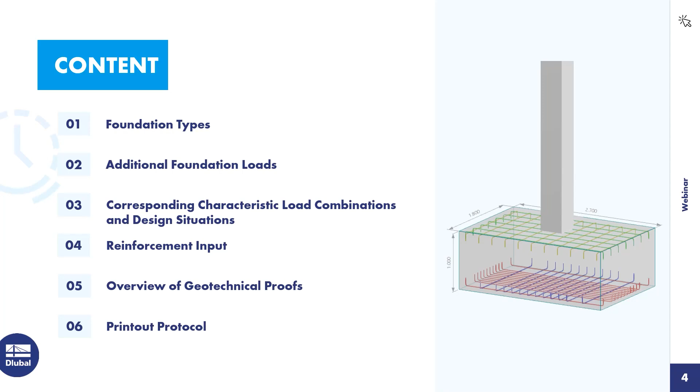Let's now switch to RFEM 6. I already created a steel hall with concrete columns and concrete foundations for you.

First, I will show you the basic settings where the foundation add-on needs to be activated. You can find it here at the top.

Under the add-ons, you need to make sure that the concrete foundations are activated. Concrete design doesn't necessarily need to be activated, but since I have a model with concrete columns here, I activated this for this webinar.

However, for the design of concrete foundations, you do not need this.

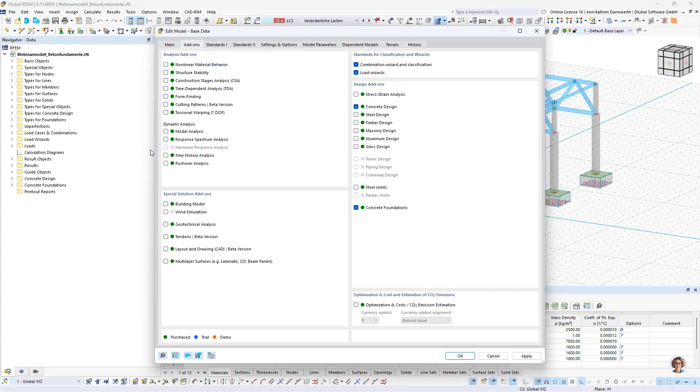Once the concrete foundation add-on is activated, we get new folders in the navigator, which I will now show you. Here we get the types of concrete design.

Normally we would get effective length, reinforcement directions, surface reinforcements, or punching reinforcements here, but only the concrete durability, as we need this for the foundations.

Additionally, new types for foundations have been added. Here you can create foundations individually and edit them.

Also under loads, when I go to load case, a new point for the additional foundation loads has appeared. Here you will find everything such as earth covering, surface loads, line loads, concentrated loads, and groundwater.

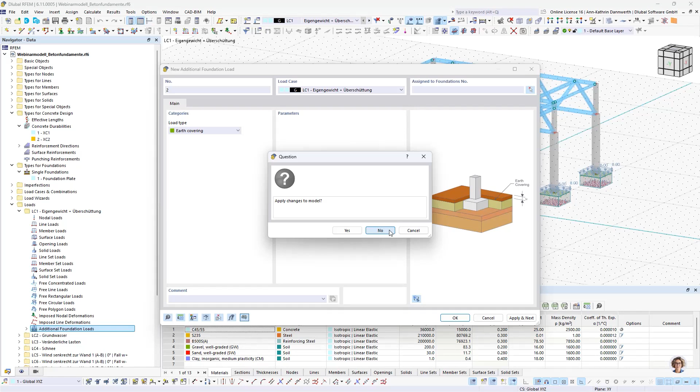At the very bottom, another tab for concrete foundations has appeared. Here you can view and edit the design situations as well as the objects to be designed and the design configurations for the geotechnical proofs or concrete design.

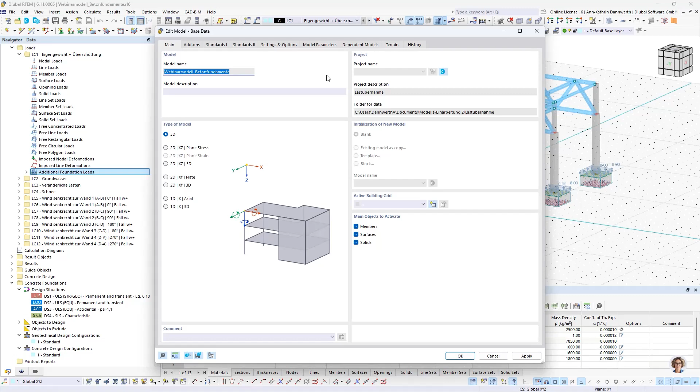What I forgot to mention in the basic settings is that if you want to generate snow or wind loads using our load generator, it would be helpful to provide your location or these data under model parameters.

If you don't want to enter them manually, you can simply select the location on the map and the latitude, longitude, and altitude will be automatically filled in, but they can also be modified here.

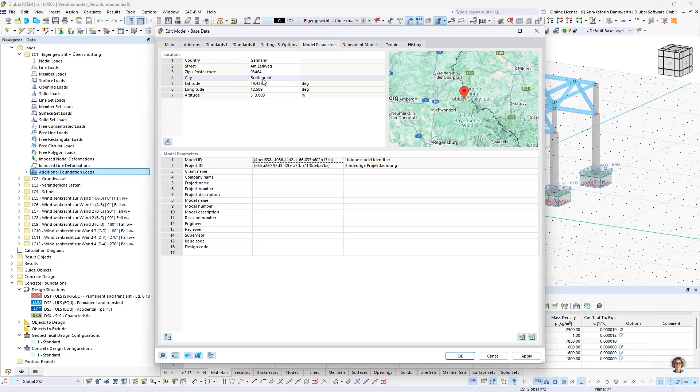I will show you now what has been modeled so far. Let's go into basic objects and materials. Here I have steel, concrete.

Steel for reinforcement, along with 3 different soils.

When creating a new material, we can go to the library to load all kinds of soils. You can find them here under material type soil.

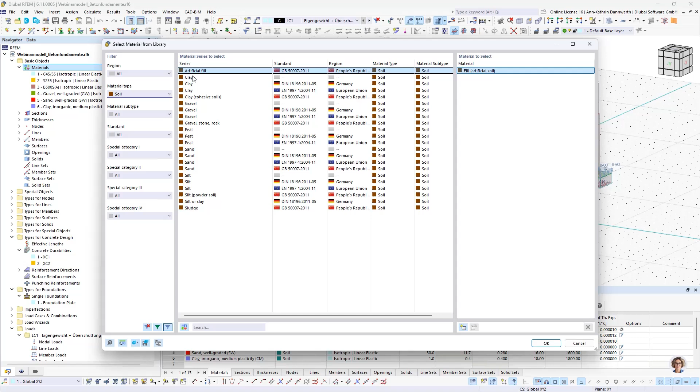I simply pick one of those now to show you the basic model parameters. However, you will likely receive different values from your soil report, so you can easily change the values.

In the material properties so that they are correctly considered in your verifications.

Next, let's move to the cross sections.

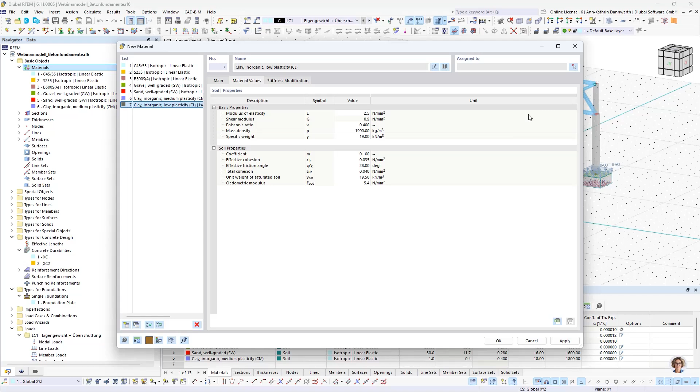I've created 2 rectangular cross sections made of concrete and 3 different HEB beams. They can also be easily loaded from the library, just like the materials.

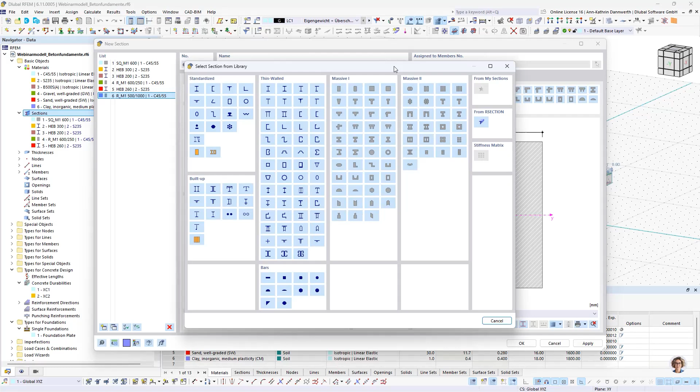Here you have different selection options. From this point on, it becomes interesting for the foundation modeling. Foundations must be assigned to supports.

To do this, I will open the types for nodes folder and access the nodal support. I've already created one here. I can either create a new one or edit the current one.

So I have now set my support with my support conditions and would like to assign a foundation. To do this, I need to check the box foundation.

When I do this, I get a new tab for foundations, and now I can select the foundation I want or create a new one. However, there is another way to create it. I will walk you through that method.

The one here has already been prepared and defined. At the top, you can see all the nodes assigned to the support, and this foundation is then assigned to the support. Accordingly, these are also the nodes for which the foundation slab is defined.

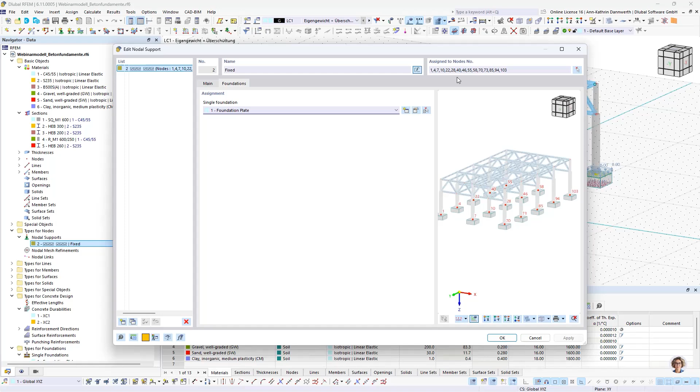Now I will go to foundation types and create a new single foundation. Here you can determine the type of foundation, which can be a foundation slab with or without reinforcement, a block foundation with smooth bucket sides or with rough bucket sides.

A block foundation with smooth bucket sides or with rough bucket sides. You can also, when you select one of them, see the graphic over here.

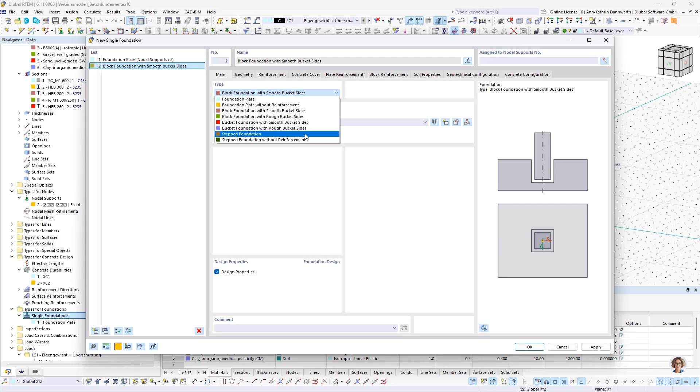Then we have bucket foundations with smooth bucket sides or with rough bucket sides. And new implemented are stepped foundations, again with and without reinforcement.

So far, only the geometry of the stepped foundation can be determined, as this type of foundation is still under development. Let me go to the foundation slab now.

In the second tab, you can create the geometry. You can define the slab geometry with the dimensions of the slab and the slab thickness, as well as the eccentricity of the column above it.

If a node or support has already been selected, the support dimensions will already be filled in here. The program automatically retrieves them.

You can also define a base plate at the foot of the support. This is very helpful because in the steel joints add-on, the geometries are also directly transferred, and anchors or reinforcements can be applied and designed there.

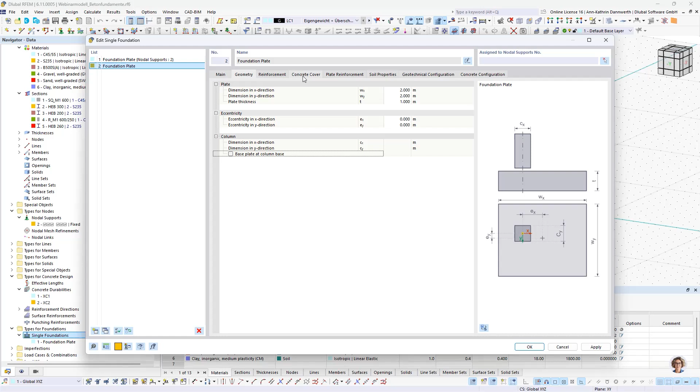Now I'll say something about the reinforcement later. Let's go back to the concrete cover. This can be controlled via this tab. Here you can also see the durability.

You can set different minimum concrete covers for the top, bottom, or sides. These values are automatically determined by the concrete durability settings. Alternatively, you can set these manually and adjust them as needed.

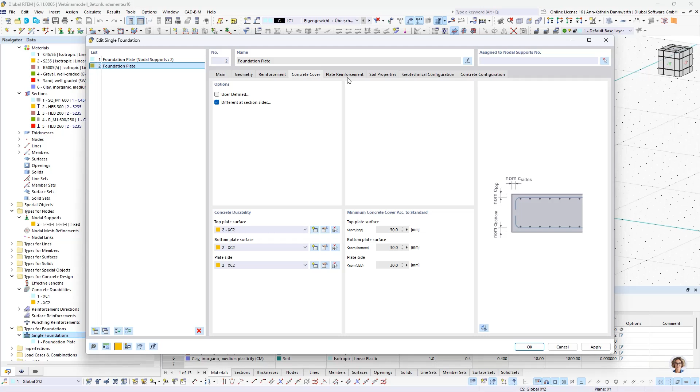Next, let's move to the soil properties. Here you have the settings for the subsoil. The conditions can be created as drained or undrained.

For the definition type, you currently only have the single layer option. The multi-layer option is still in development. This can then be controlled through boreholes, or if you have the geotechnical add-on, you can define them in the future via a soil massif.

Here you can also set the soil parameters for friction angles, groundwater level, and earth covering.

However, I first need to pre-enter something in the soil layers. The gravel was automatically selected because it's the first material of the soil type. So that would be region A below the foundation.

Region B would be beside the foundation. I can define that here. I'll just add sand for now.

If I want to have earth covering, I also need to fill in region C. Then there is the option of earth covering here, and I can enter the thickness. Let's say it's 1 meter. I can see that directly here. That's 1 meter above the foundation node.

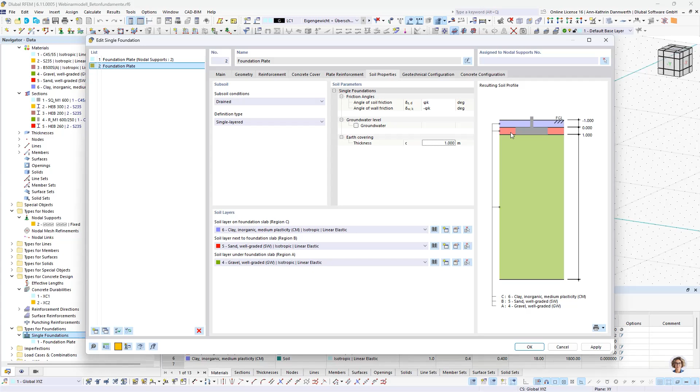Now let's move on to the geotechnical configurations. Here you'll find all the safety factors and other factors you need for design verifications. These can be controlled by reviewing or editing the geotechnical design configurations.

The parameters you just saw can be set here in the standard parameters. In the basic settings, you can also deactivate design loads if you don't want them.

You can also assign different design configurations to different foundations. Accordingly, you can decide individually for each foundation which settings should be activated or deactivated for the foundation design.

For ground failure, there are two options for determining the ground failure resistance. It can either be calculated according to the Eurocode, or you can manually enter a characteristic value.

For the sliding verifications, there are also adjustment options. Here you can control whether the equilibrium, uplift, or the large eccentricities should even be considered for the verifications.

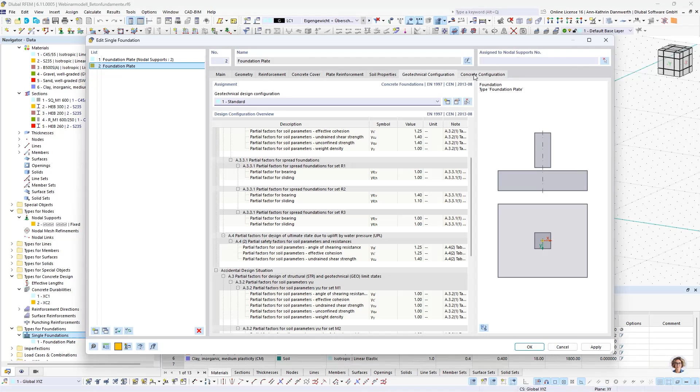Now let's move on to the concrete configurations. This section is similar. There are many safety factors here, as well as material parameters and ultimately everything we need for the design. You can adjust these here.

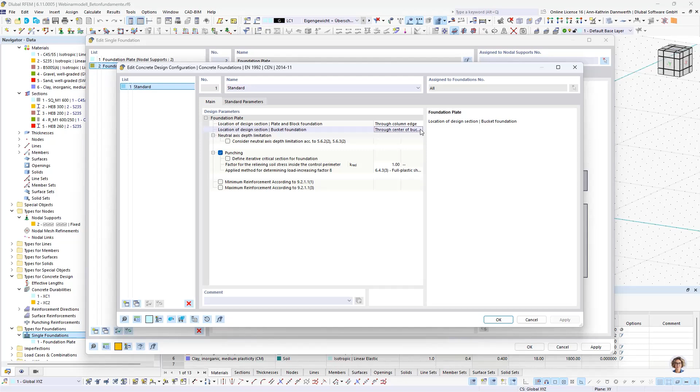In the basic settings, you can also determine whether punching shear should be considered in the design and how the handling of the minimum and maximum reinforcement should be managed. The position of the design section can be set here at the top.

Now let's move on to the additional foundation loads. I will go to the Loads folder into load case 1, and here to the additional foundation loads, where I will create a new one. For the load types, we have surface loads, line loads, and concentrated loads available, as well as earth covering and groundwater. The surface load can be applied to the entire foundation by simply assigning the foundation and setting the load size.

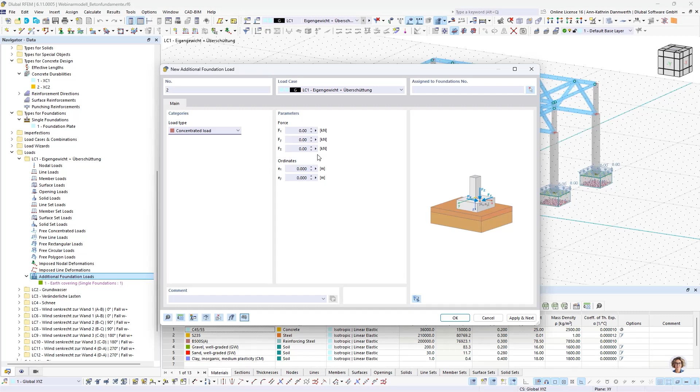Line loads are similar, but here you can also define 2 points on the foundation between which the line load should act. These ordinates have the node of the foundation as their center. Let's move on to the concentrated loads. This works the same way. You can determine the location of the concentrated loads through the ordinates, again depending on the node of the foundation, and define the components in the X, Y, and Z direction.

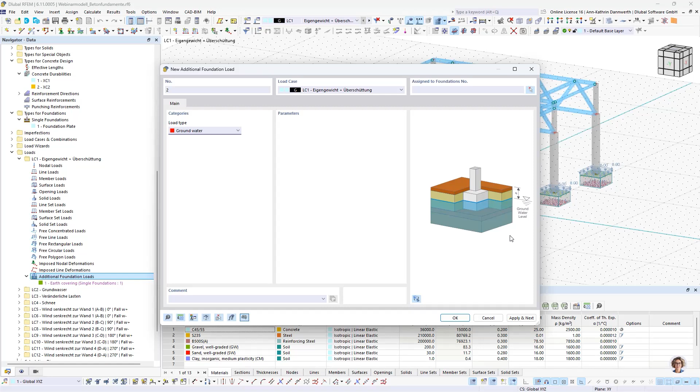The earth covering is automatically generated by the system. You can control this through the soil properties when editing the foundation itself. The same goes for groundwater, which is also automatically created. I will go back to show you. In the self-weight load section, I have enabled earth covering, and it's why it appears purple here, since it has been automatically generated. If I go back into the foundation, into the soil properties, this is where I can define it. The weights from the earth covering are also considered here. So there's no need to calculate the earth covering or convert it into a surface load manually.

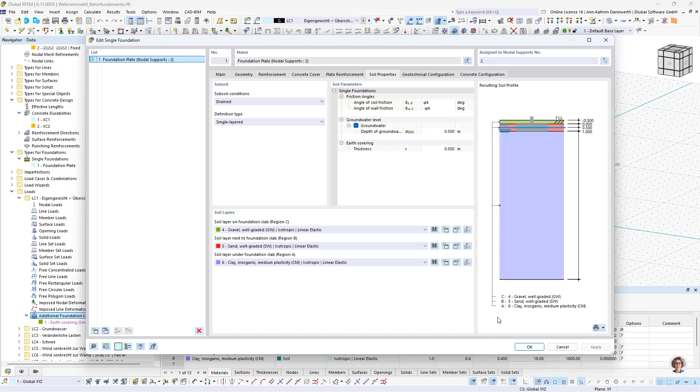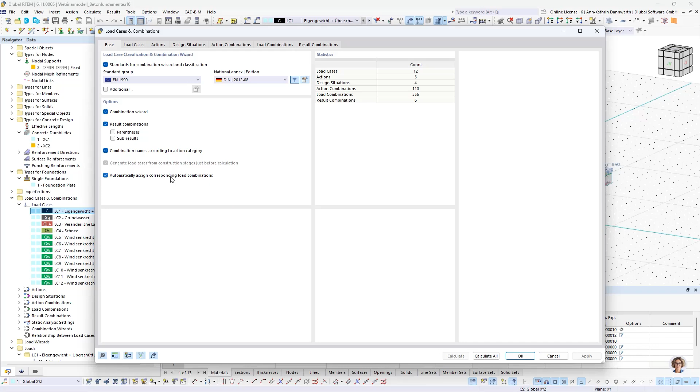Now, let's move on to the corresponding characteristic load combinations and the design regulations. I will go into the load cases and the basic settings. If the combination wizard is enabled, the box for automatically assigned corresponding load combinations should also be checked. Accordingly, you will later have the load combinations generated by the load wizard in the load combination section. Therefore, you will later find the combinations generated here, and the corresponding combinations should also appear.

The ground failure and the sliding safety verifications can only be carried out with the assignment of these characteristic loads. Manual assignment is also possible. So if you don't want to use the load combinations from the combination wizard and prefer to create them manually, you can also add the corresponding characteristic loads via this drop-down menu here.

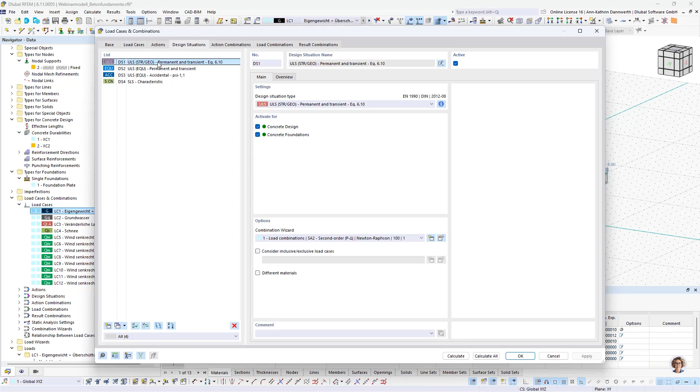Now, let's have a look at the design situations. For the geotechnical verifications, we need the ULS, ultimate limit state, for permanent and transient loads. We also need the design situation for equilibrium of structures for both permanent and transient loads. You can set all of them here. In addition, the one for accidental influence, and of course the characteristic one, which we definitely need to assign.

What I forgot to mention earlier is that for the additional foundation loads, we need to activate the self-weight for the concrete foundations in the load case, where the earth covering should also be considered. This will add a new tab at the top. When we go to this tab, we can specify exactly what should be included in load case 1. In this case, I added the active self-weight of the foundation structure to the self-weight and included the earth covering.

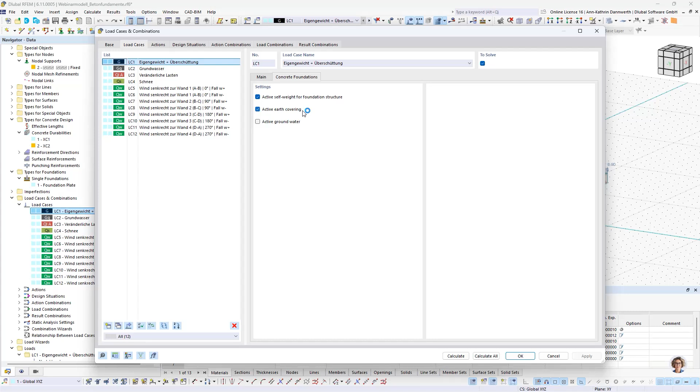I placed the groundwater in a separate second load case because it can also positively affect the verifications. You can see that here. Now only the active groundwater is included into this load case.

Now let's go to the reinforcement input, which I skipped earlier. For the foundation plate, you can define the material and the reinforcement type here. As mentioned earlier, you can choose from mesh reinforcement, reinforcement bars, or a combination of both. I've chosen a combination of both here.

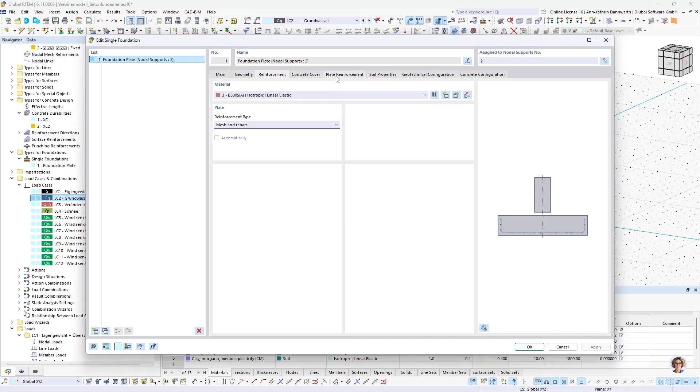I will then go into the plate reinforcement. Here I can define what I want to lay for the upper and lower reinforcement individually. First, we have the definition of the mesh. Again, there's a selection of various meshes I can choose from. The bars can also be defined in the X and Y directions, with diameters and spacing. The same applies to the lower reinforcement. Here I can define the mesh and the bars in the X and Y direction. What might be interesting here are the areas 1 and 2.

Area 1 is the outer quarter, both left and right. Area 2 is the middle section.

Now you can also view the reinforcement arrangement in our program. To do this, I will first turn off the upper reinforcement so we only see the lower reinforcement. Now you can see the number, the rolled diameters of the reinforcement, and the position numbers.

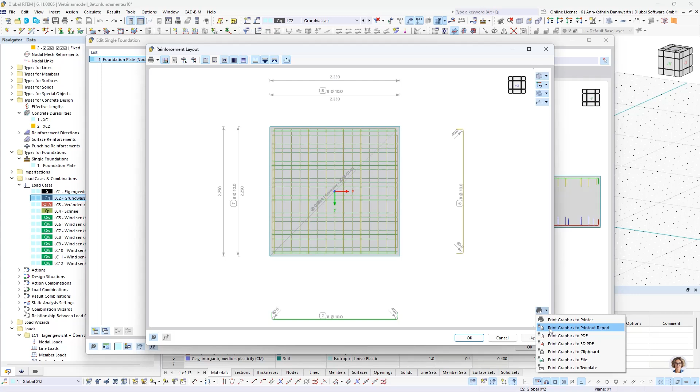The same can be done for the upper reinforcement, where you can also see the mesh designation. And through this button, you can print this graphic directly into the printout report. But I will talk more about that shortly.

I also wanted to show you the reinforcement input for the bucket foundation. Here I will choose a bucket foundation. The geometry does not yet have a support because I have not assigned a node or a node support yet. I will do that quickly.

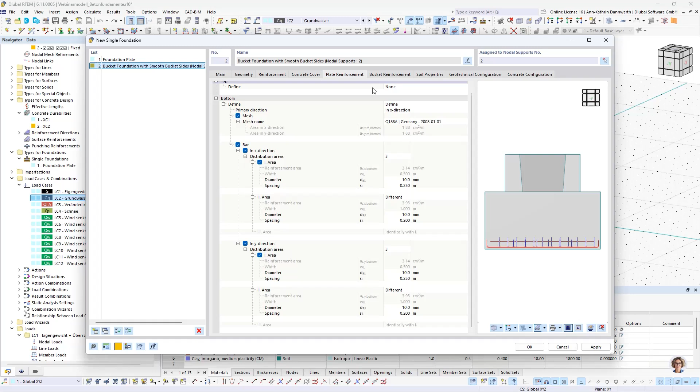Now we can go into the plate reinforcement. It looks the same as with the foundation plate. The bucket reinforcement has now been added as well.

Here you can define the horizontal stirrups first. You can also define the vertical stirrups in the walls in X and Y direction. Let's take another look at this.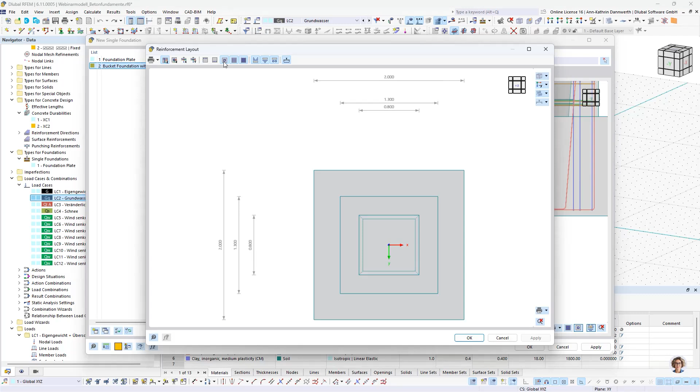To display the bucket reinforcement, this button must be activated. I've turned off the other two for now. And here you can choose between different views to display the bucket reinforcement in all three views.

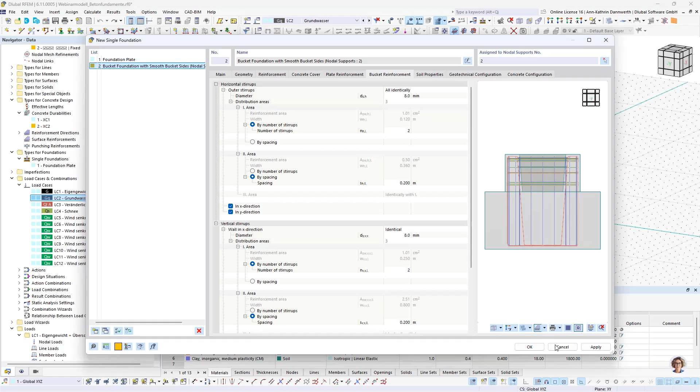Next, I'll give you a more detailed overview of the geotechnical design checks, which are an essential part of evaluating the foundation stability and safety. I already had the system perform the necessary calculations in advance to save time.

I will go ahead and turn on the results here and navigate to the concrete foundations. In the overview, you can see that one of the design checks has not been fulfilled. I'll go into more details on that shortly.

Here you can view an overview of the relevant results, which gives you insight into the performance of each foundation. This overview is sorted per node number. Additionally, it shows which design checks have been carried out for each foundation. Let me make this a bit smaller so we can clearly see the names of the checks as well.

First, we have the ground failure design check. When I go into that, we will see the complete calculation process for this specific check.

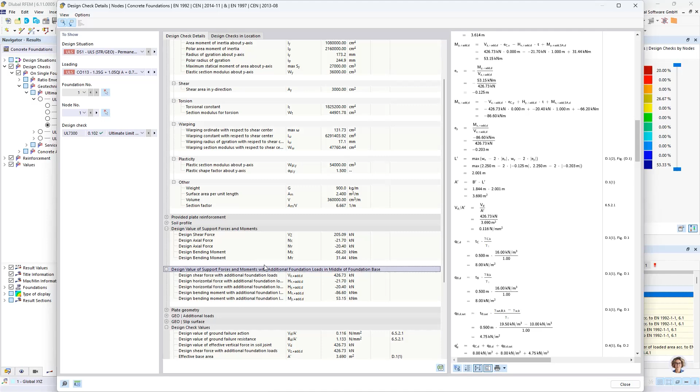All the necessary details are provided here, including cross-section values and design forces that contribute to the calculation. This helps ensure that the foundation will remain stable under the given loads.

Let's take another look at the top here, where you can find these results. In the navigator under Results, you can easily view the geotechnical design under the Design Check section.

Specifically, in the ultimate limit state, you will find the number UL 7300, which corresponds to the ground failure design check. If we click on that, you can view the utilization for each individual foundation.

This will show you how close each foundation is to reach its limits. Additionally, you can also see individual stresses here, which provides an understanding of how forces are distributed across the foundation. If necessary, you can also view the failure figure, which helps identify the exact area of concern.

Moving forward, I also have the sliding design check, which is another important aspect to consider in the evaluation of foundation stability. You can also view this design check for each individual foundation, ensuring that sliding movements are within acceptable limits.

Furthermore, here is the design check for the equilibrium of structures, which has been exceeded for some of the foundations. Since this involves tipping around an edge, you can also display which edge is critical or which design check has not been fulfilled. Looking at this, I see that for these three foundations, tipping around the right edge has not been fulfilled.

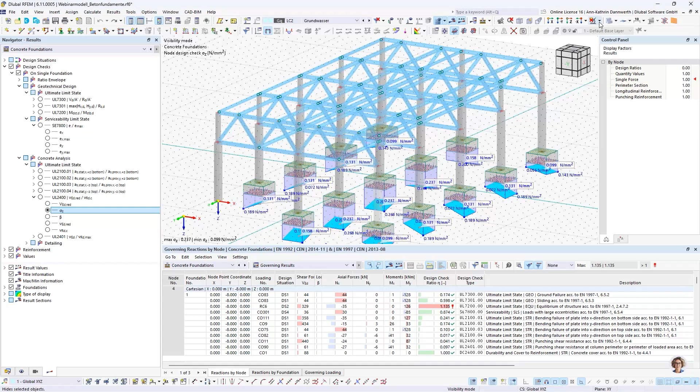Since I have several foundations in a row, I can also choose to display just one foundation at a time to get a more focused view. This way, I can see the exact stress distribution for that individual foundation. I will hide this view now to keep things clear.

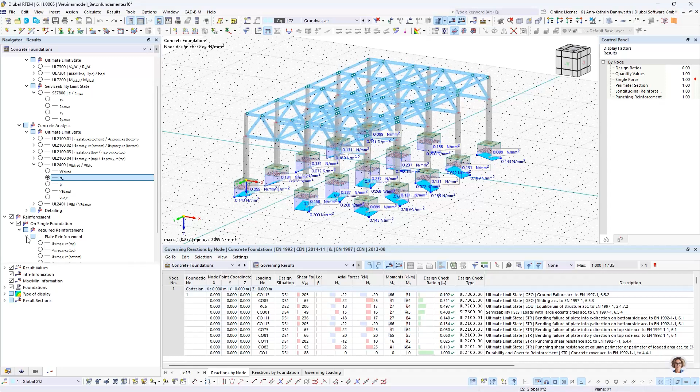You can view the upper reinforcement here, for example. This is the reinforcement in the X direction at the top of the foundation. Similarly, this is the reinforcement in the Y direction at the top. The lower reinforcement is displayed in the same way, providing a complete picture of how the foundation is reinforced.

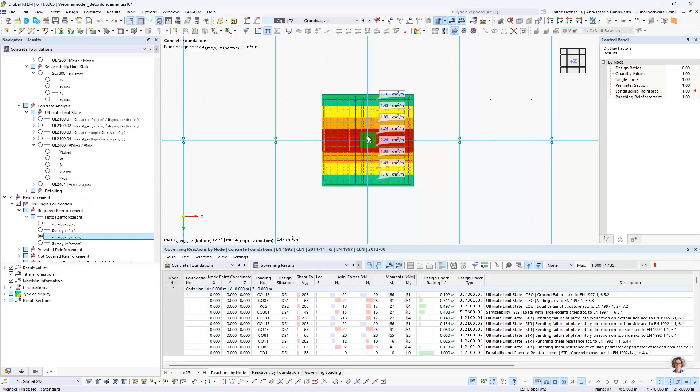Let me switch the model to wireframe mode so that we can only view it from the top. This view allows us to see how the reinforcement is distributed more clearly. This way, you can also see in more detail where and how much reinforcement is involved, ensuring that every part of the foundation receives the necessary support.

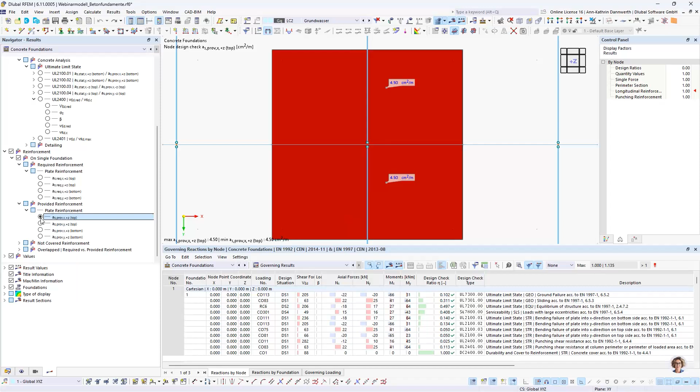The same applies to the existing reinforcement, which you can also display. Then you can view the top reinforcement in both directions as well as the bottom reinforcement in both directions. And you can also see here the uncovered reinforcement, which should be 0 everywhere, indicating that no areas of the foundation are left without adequate reinforcement.

Perfect. This is done analogously for other types of foundations, as well as for the bucket reinforcement, ensuring the structural integrity of the entire foundation.

Now, let's take a look at the printout protocol. I will create a new printout protocol here. In the Printout Protocol Manager, you can manually decide what exactly should be included in the printout.

I will start by reducing everything, selecting all, and then deactivating everything. Now I will only select the items that are relevant for the foundations. So I've selected the folder Types for Foundations here.

Let's see what we have. For example, I don't have rough bucket reinforcement, but I do have plate reinforcement. These are the relevant options for this model.

In the loads section, we also have the additional foundation loads that I'd like to include just to show you. Of course, I can select many other options, but it depends on your specific needs.

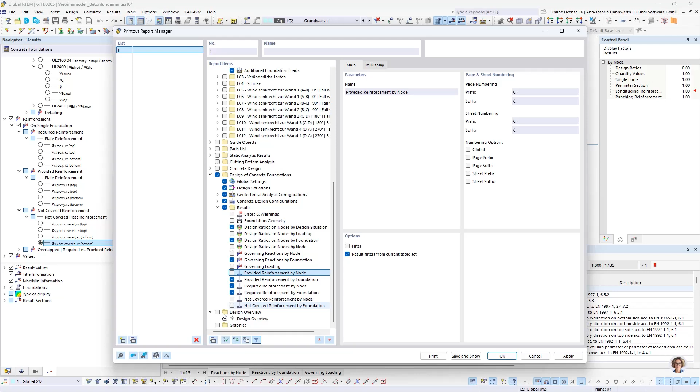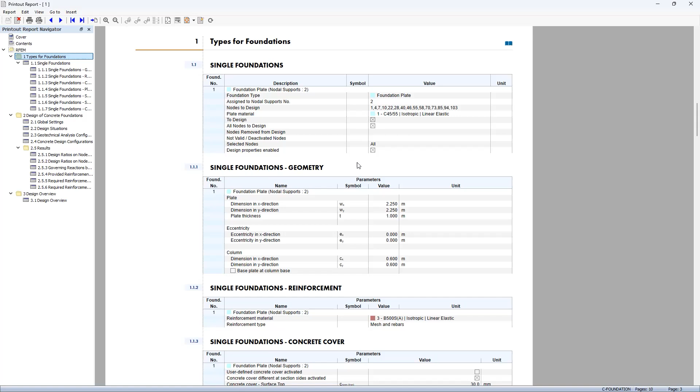This is how the printout protocol looks. Here we have the table of contents, and then it directly starts with the types of foundations. Here you can see again the types of foundations we have, which node they are assigned to, the material assigned, and then the geometry you selected. If you had several foundations, you would see a list with multiple tables like this.

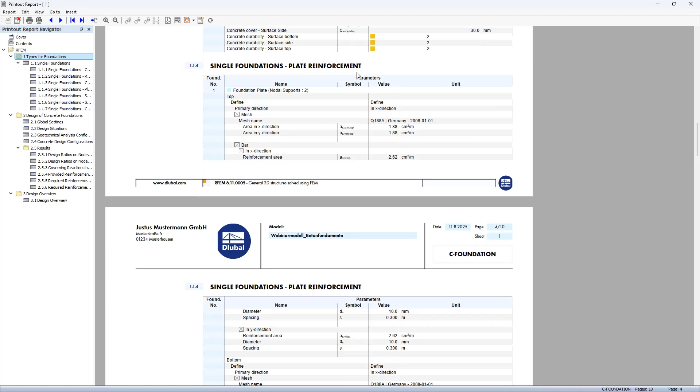Then we have the type of reinforcement, whether it's a mesh reinforcement or rebars, and the materials for the reinforcement steel. Next, we see the concrete cover for the foundations and the amount of reinforcement laid out, both in the mesh in the X and Y direction at the top and the bottom.

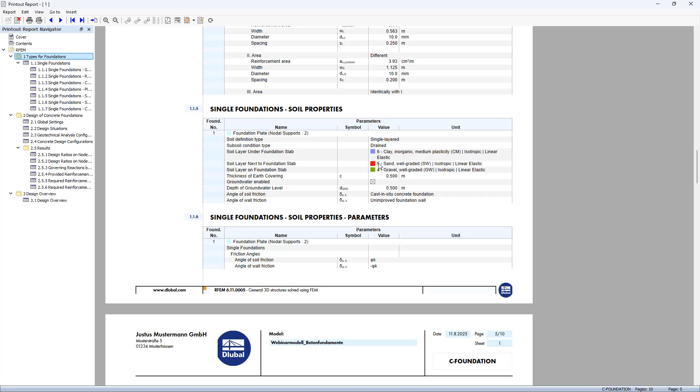You can also see the selected soil properties here, or rather the soil layers that we've chosen. This includes earth covering, groundwater, and the friction angle. Finally, we have the global settings. For example, the design approach is set to approach 2, which is relevant for the ground failure design check.

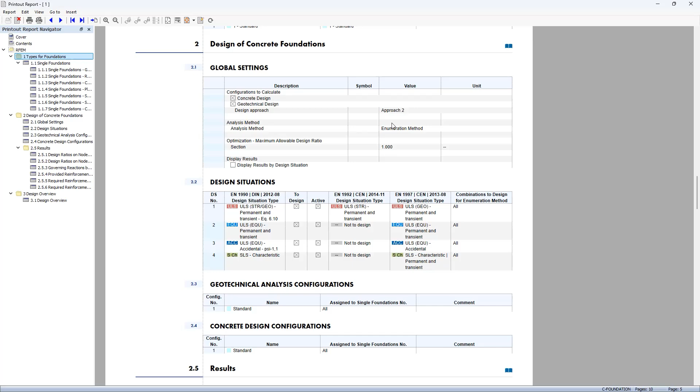I didn't show you the global settings earlier, so let me go back to the model, to the foundations input. And then you will find the global dialog for settings. Here you can select the design approach. As I mentioned, this is important for the ground failure design check.

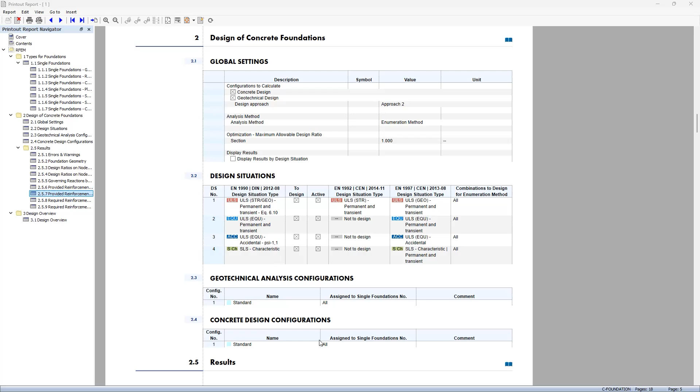Now I'll go back to the printout protocol. Here I have also included the design situations for ULS, the equilibrium of structures, as well as the accidental and characteristic cases. I've also output the configurations for the geotechnical analysis. Then here are the errors and warnings.

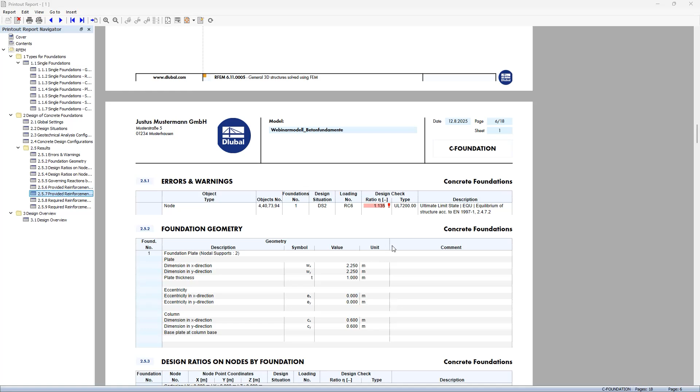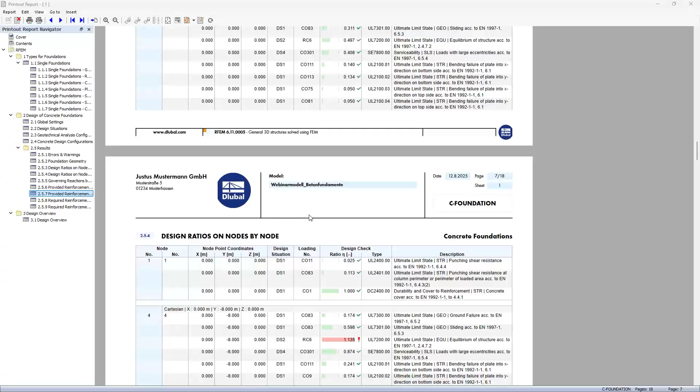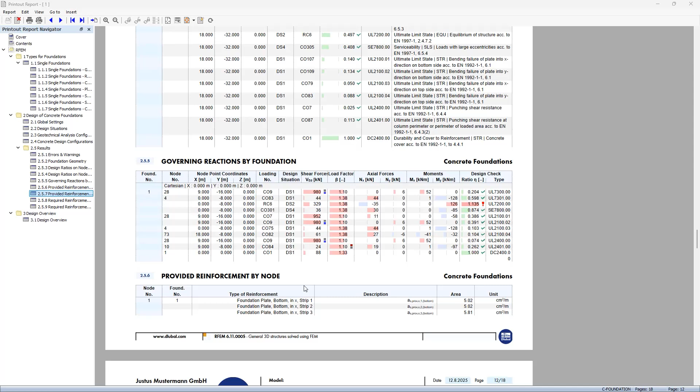The design check for equilibrium of structures was not fulfilled, as I showed you earlier. Next, we have the plate geometry and the utilization at the nodes, node by node, which is more detailed since we have a few node foundations. You can see in detail at which node and foundation, in which result combination, the design check did not pass. As mentioned, there are quite a few right now.

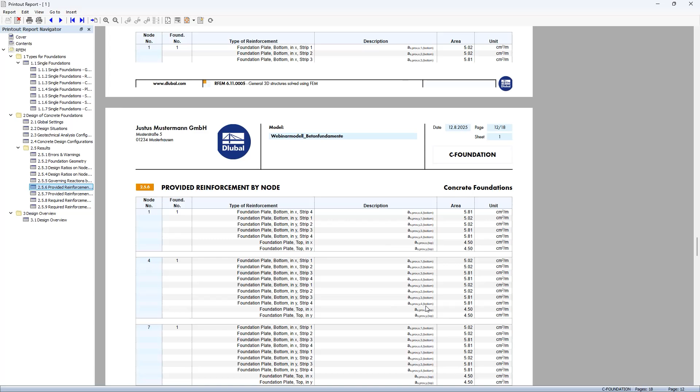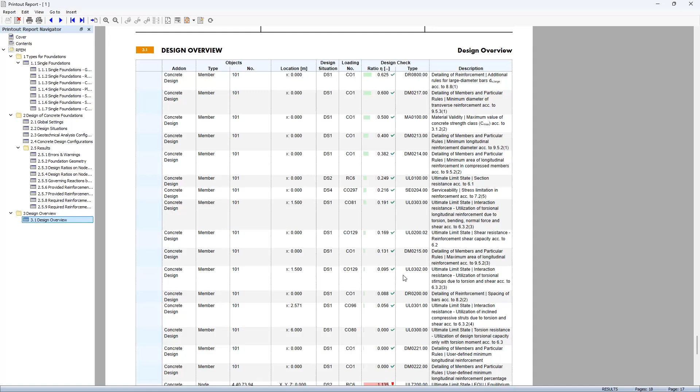Next, let's go back to the existing reinforcement. You will also see a list for the upper and lower reinforcement, then the required reinforcement is shown, followed by the design summary. There are no images for the reinforcement or the model included yet, except on the cover page, where you can briefly see the model.

Here you can also customize details like the project name, the client, and who created the model.

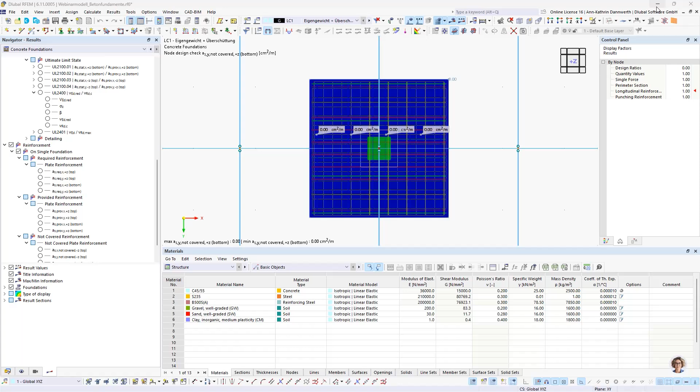Now I'm going to exit for a moment because I want to add one or two things to the protocol. To do this, I'll go into my foundation, go to the plate reinforcement, and then to the details. I want to include the lower reinforcement first. I can do that by going to the printout protocol at the bottom. It's already there.

You can also give it a custom name here, just for lower reinforcement. Otherwise, I'll leave everything as it is. Then I'll also add the upper reinforcement to the printout protocol, so reinforcement on top.

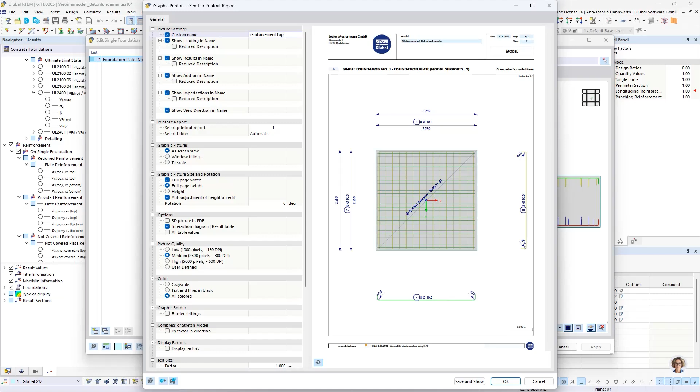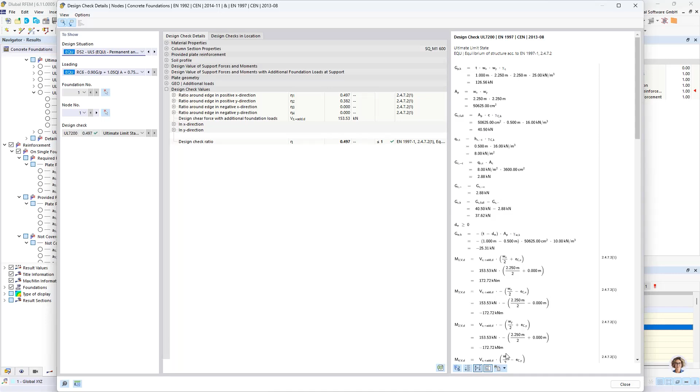Now I can also include individual design checks in the printout protocol. For example, I include the equilibrium of structures for node 1. Now I want to have this design check in the printout protocol, so I click into send to printout protocol. Now I'll switch back to the printout protocol to show the changes.

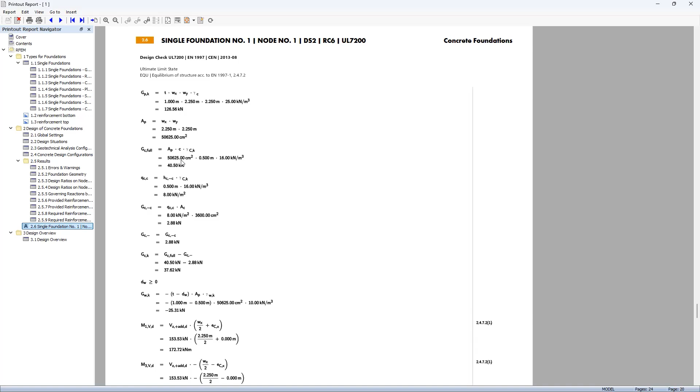So here at the bottom, I have the design check included under results, directly below the results section. Here you can follow the entire calculation process, and all the variable names are included as well. You can take another look at both the lower and upper reinforcement here.

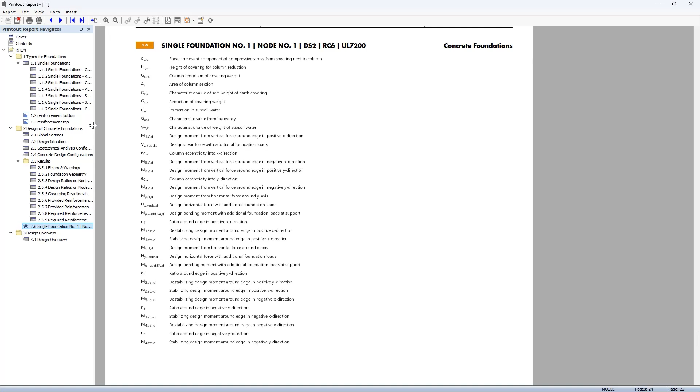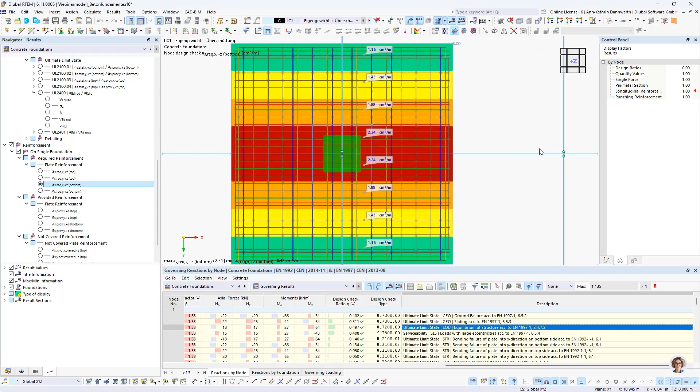Ultimately, everything you see in this display window can also be transferred to the printout protocol. To do that, I would first like to take the required lower reinforcement from the slab. I will hide the reinforcement bars, meshes, nodes, and supports for the view to make it a bit nicer. I can do that by going to Types for Concrete Foundations Reinforcement and simply clicking this checkbox. I don't need to see the node, and I don't really need to see the support right now either. This is the way I would like it printed.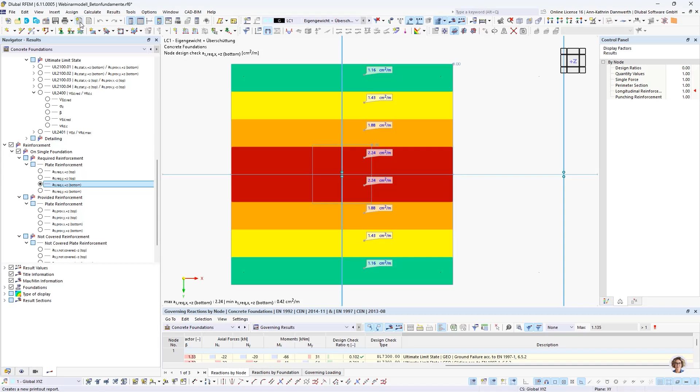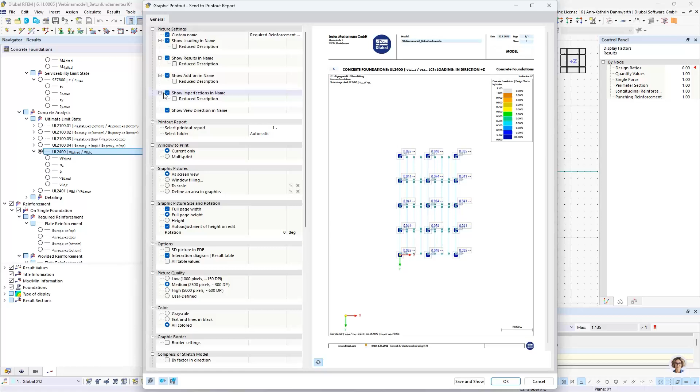Now I can go to the printout protocol at the top and get this view. I can directly print it into the printout protocol by pressing this button. I can do the same for any other design check as well. I will take the punching design check for now. Then I'll click print and select the area I want to show, as the current view is not suitable. I can do that by simply clicking two points here.